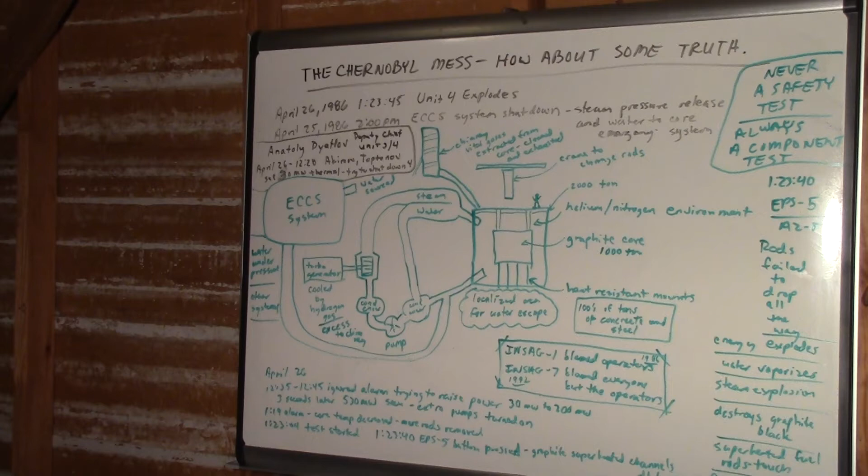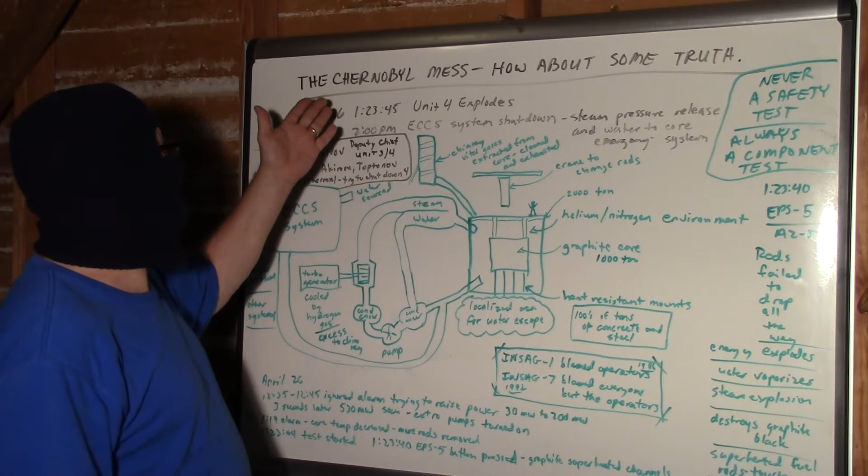How about some truth? First off, any report that says that explosion happened because, and solely because, of design faults in the reactor is a bald-faced lie.

In 1986, the International Atomic Energy Agency released a report that blamed the operators, and in 1992 they came back with a report that blamed everybody but the operators. And the facts of the matter are that the reactor was mishandled by one person in particular who was charged with doing a component test on a live reactor.

They had this turbine test that they had to do, which was a spin down turbine test to see if they could derive enough electricity in 60 seconds to power pumps that put water to the reactor core to cool it. They should have done this test on a turbine connected to a similar pipe but not connected to an active reactor. They should have never done this on an active reactor.

And this 1992 report seems to completely forget about how the reactor was mishandled. It actually says in the report, in not so many words, that any nuclear reactor that depends on human operators is bound to have an accident. Well, that's an interesting assertion, because as far as I know, every nuclear reactor in the world is handled by human operators.

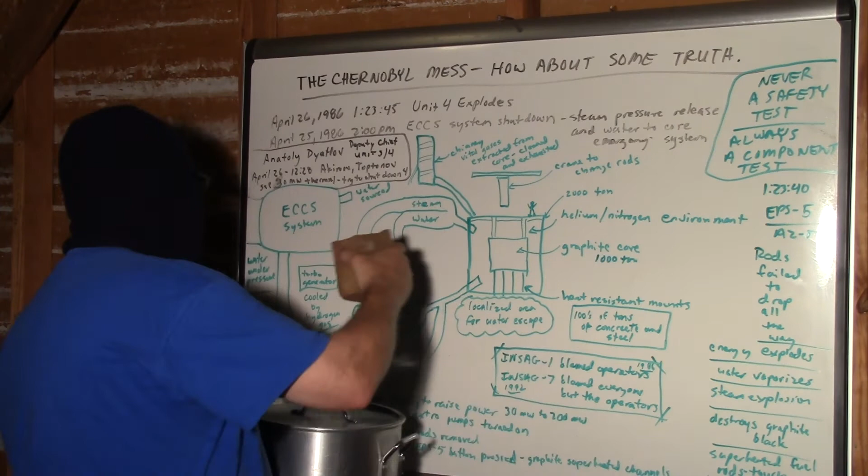Ironically, they pull the hydrogen off and run it down as a gas to cool the generators. It's just really neat. They store the hydrogen in tanks there too to do that.

There's so many things in this reactor that are advanced and designed to create a safe operating system, that if you follow the rules, it's a relatively stable reactor that will not get you into trouble.

The one thing the Chernobyl accident did show the entire world, and it's incontrovertible, you cannot argue with this, is that every nuclear plant needs to have a containment system. They have to have it. You cannot have what happened at Chernobyl ever happen again.

I'll get into the nature of some passive containment systems, some sort of space age stuff, at the end of the video. But for right now, let's just say they should have had some form of containment over this thing, even though there was an explosion that would have probably damaged the containment building. It's almost guaranteed, because it pulverized the concrete building when this second explosion went off. We're going to get into that too.

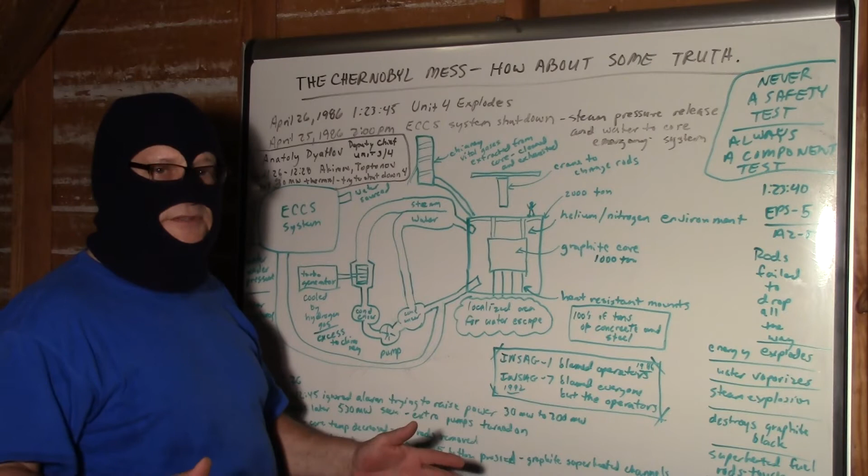So what do you do? Well, my view was you talk to the electrical engineers. First off, let's go to the core of what they were trying to do that day. And it matters. The INSAG-7 report doesn't even seem like it matters. But they were gambling the entire reactor so that this generator wheel would spin for 1 minute of free power. That's all they were looking for.

This sucker weighs thousands of tons. You would not believe how heavy this sucker is. I saw the weight of the generator and the weight of the turbine wheels, and it's thousands of tons. This whole system here is just incredibly heavy. So you can imagine what it takes to spin this thing. And not only that, generators have their own resistance inside of the stator as it spins through magnetic poles. And like I said, I had another video here which, primarily because of the drawing, I had to take off because the drawing was not accurate.

Anyway, if you've ever spun a small electric motor or a small generator, when it spins through the poles, you'll feel resistance. And that's a little teeny tiny thing. You can actually feel the resistance. Imagine that multiplied by 1,000,000, how much resistance that is going through the poles, plus spinning the thousands of pounds of steel and exotic metals that's in this generator system.

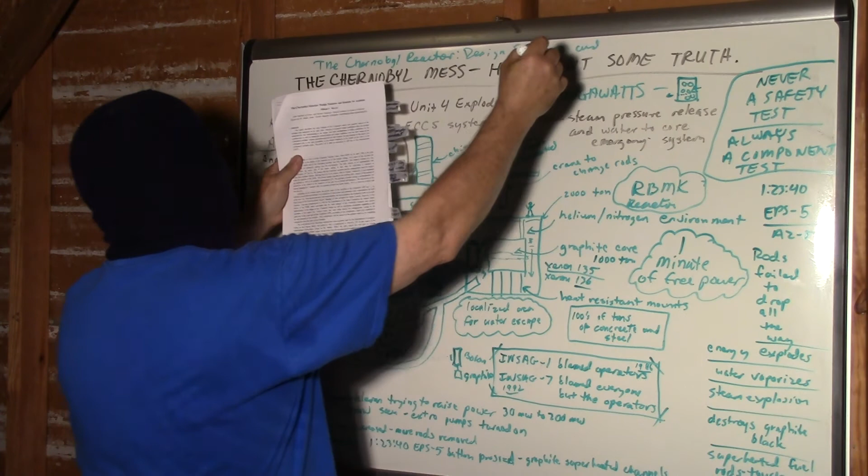The Chernobyl reactor design features and reasons for accident, by Mikhail V. Malko.

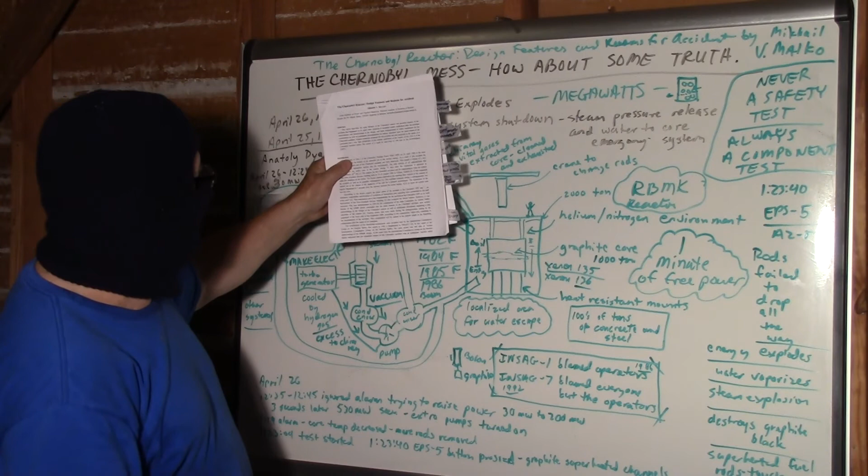You want an insightful description of everything that happened in that accident, and you want really good information from someone not wearing a mask, get to this and download it. I think it's like 17 pages maybe, but that's my copy of it right there. And just read through that thing and just be really saddened, because Dyatlov should have never done this.

And when you look at his life, he was born to poor parents, they were raised in farmland around a penal colony, so he knew about what the communist system would do to people who spoke up. He was an electrical engineer, went to work on Soviet submarines, putting reactors in. He got radiation poisoning and got really, really sick. His kid got leukemia and died. He went to Chernobyl, and I caught myself feeling sorry for this guy.

I mean, you look at the guy, and he looks like a proud Russian guy that was just trying to do his job. But then when you go on this site, let me do a little clean off here, because I think we've done enough with this here.

I mean, they remove rods. They say this test started at 1:23:04, but there are indications in some of this literature of pumps being turned off like a half an hour before that. And then there's indications of all the pumps being turned on at one time. The problem with that is, if you get too much velocity through the pump system, it doesn't go through the radiators slow enough to take the heat out. So you return heated water back into the core.

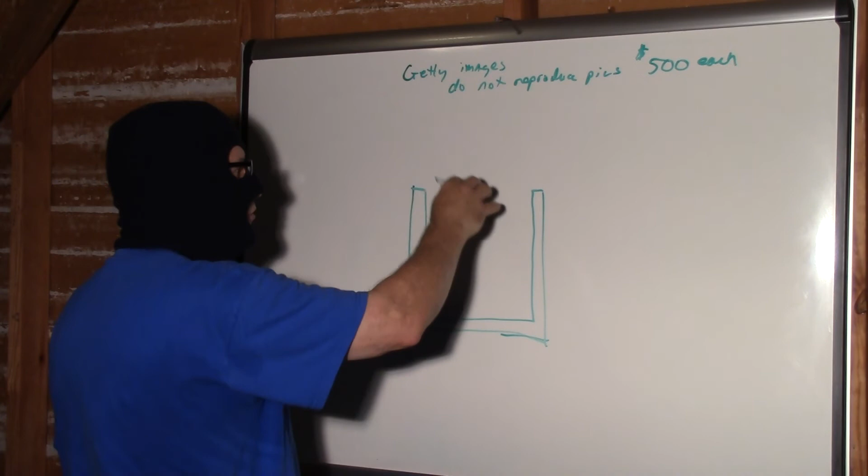But this is where the cap sits. Here's where the core is. There's pipes right here, like this, and this sucker is massive. I mean, it's 1,000 tons. I saw numbers on this of being 1,000 tons to 2,000 tons.

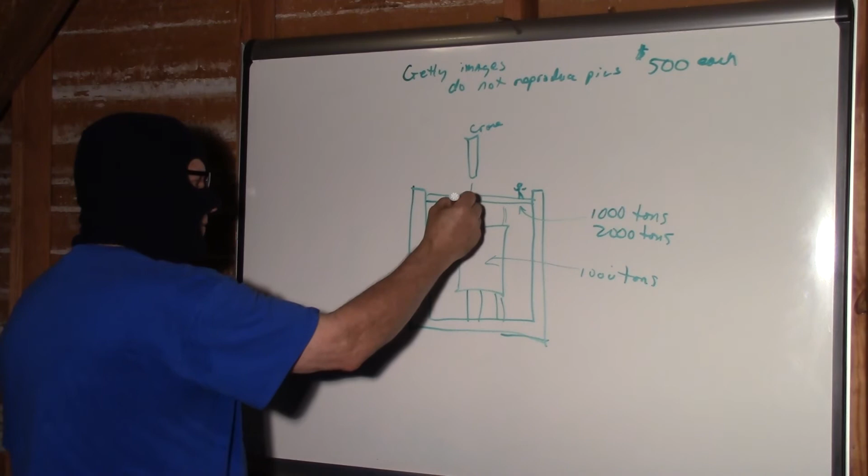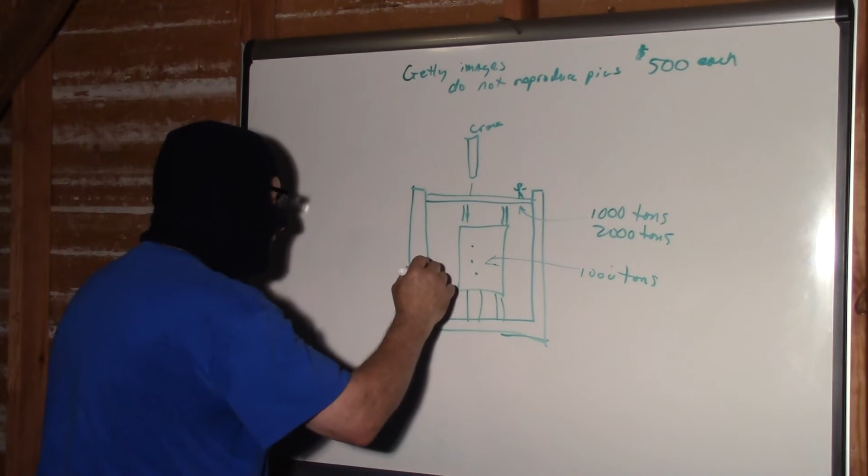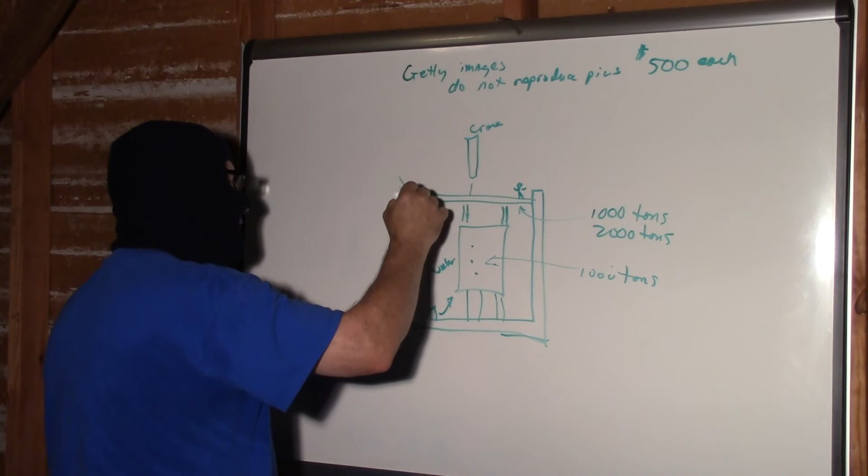And you got a machine here, a crane, that feeds fuel into these lines, and I would assume also can put absorber rods in there too if they need them. And they go down into the core here, and this is all water through here, going up through here. You got your water coming in this way, going in, steam and water going out.

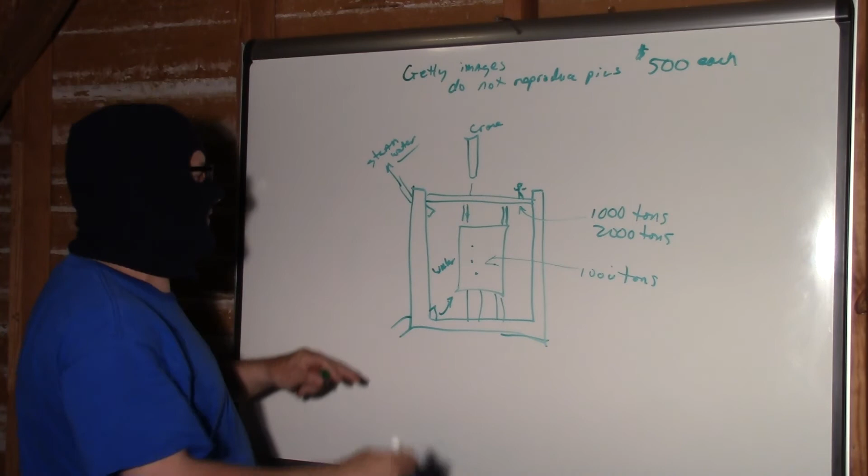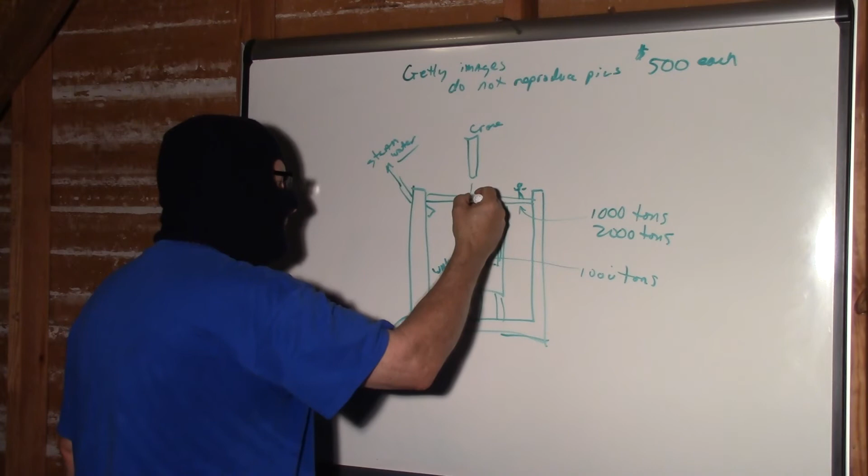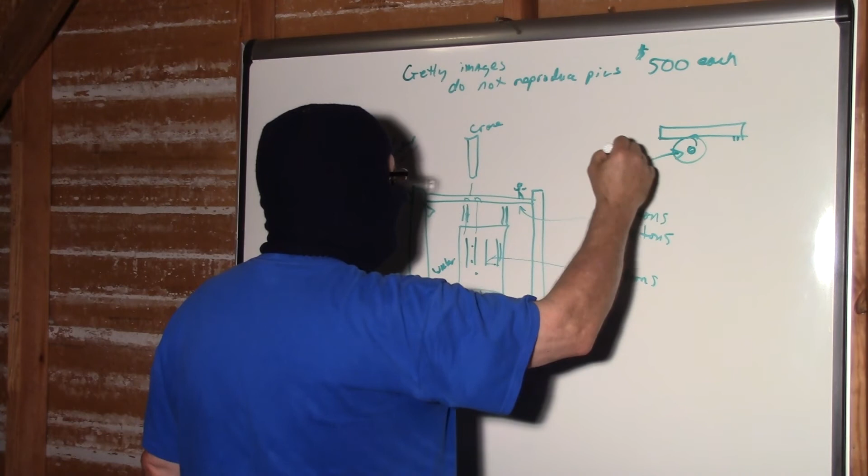All of these fuel rods in here, all of these absorber rods in here are tied to a tile each in this top. My assumption is that the tile is like this. It probably has two electrical contacts here, so when the tile goes down into the square, those two electrical contacts touch. This is a motor. This is a cable.

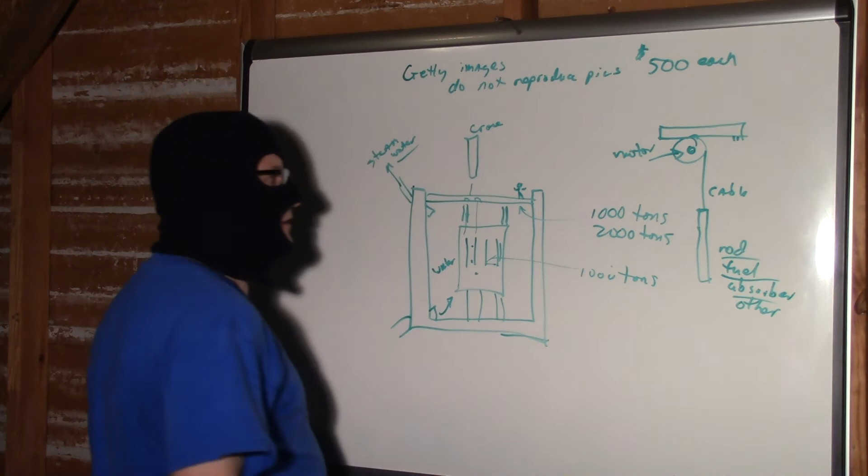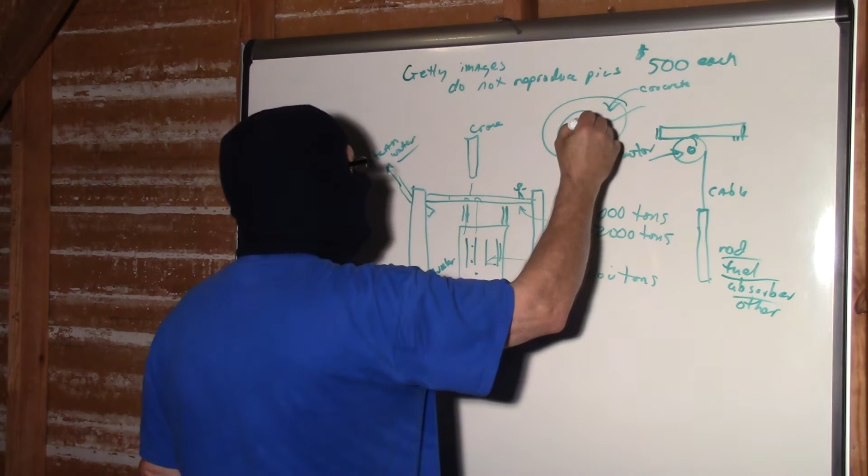And this is the rod, be it fuel, absorber, or other, because they had several different types of rods in there. And this fits into a receiver in this cap. Now the way this cap is designed, it's like this and like this, and all your fuel rods and stuff goes in here. And this is a massive, massive concrete piece. And I understand this is steel, and I could be wrong about that, but I'm doing the best I can. But they're all hanging right here, like this, okay?

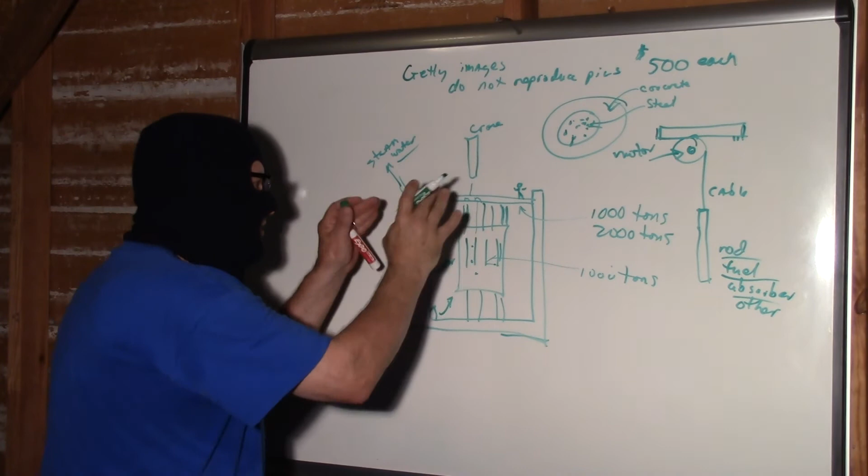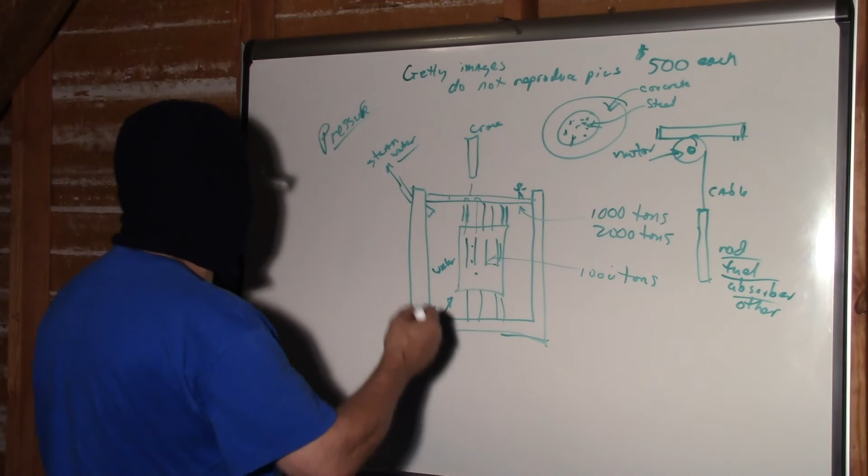And you gotta understand that this is all steam under pressure. I had to laugh every time on this HBO special for Chernobyl, they said, "How does an RBMK reactor explode?" Well, dumbass, you're dealing with steam. Anything that deals with superheated steam can explode. They had a real problem with that with locomotives, with steam generation in houses. They have a problem with that today, and that's one of the #1 things that union steam fitters deal with. You always want to have a check valve system where excess pressure goes.

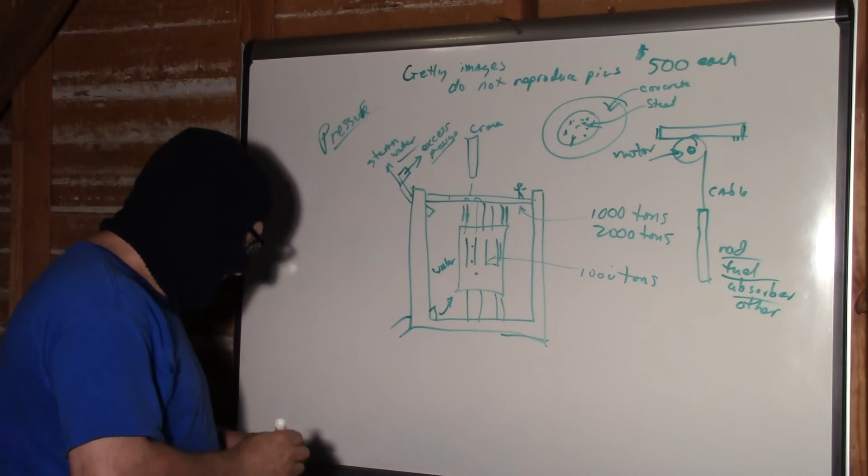I'm not going to go through all of the things they shut off. They shut so many safety systems off before this thing blew up. For that INSAG-7 report to say that this was bound to happen because of design failures, that is a bald-faced lie. It takes the responsibility for those people's actions from themselves and puts it on the designers. The designers put the safety systems in there. They were not the ones who turned the safety systems off.

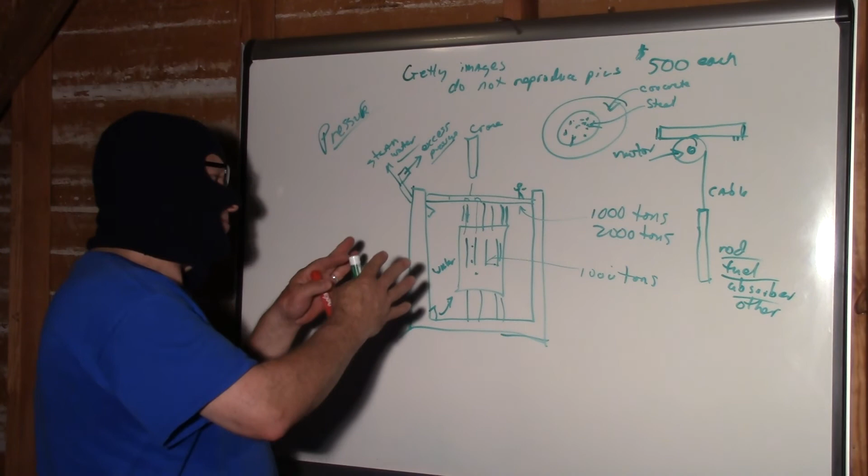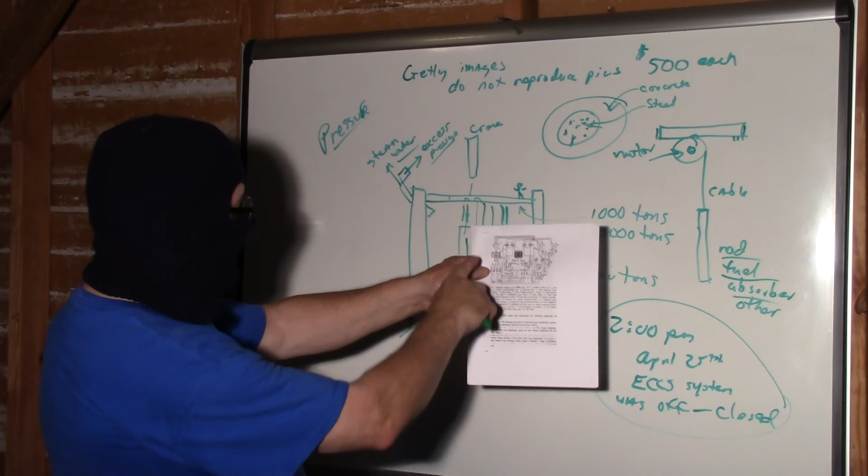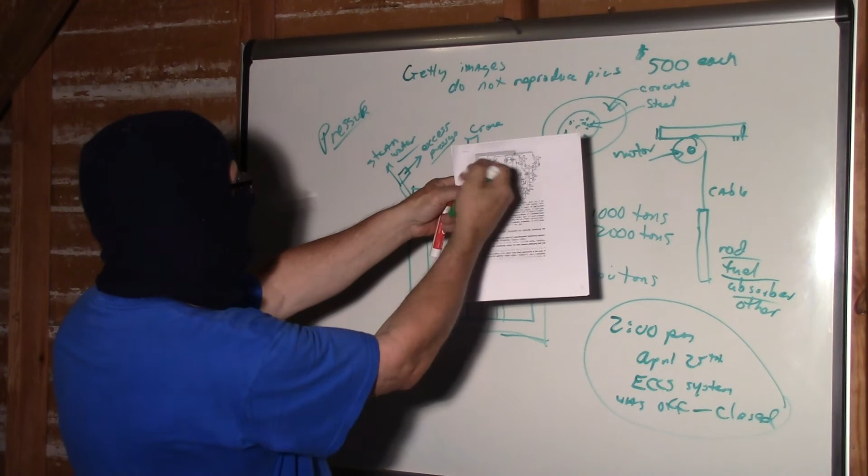Anyway, so this thing got smoking hot. Now remember, since 2 o'clock p.m. on April 25th, the ECCS system was off, closed. This little box right here is a neat little box, because that shows you the steam coming out of all of the lines, coming over to this collector, and this is wide open. You know why that's wide open? That's because the steam is generated here, they lower the velocity of the steam coming out, it shoots up here and shoots out.

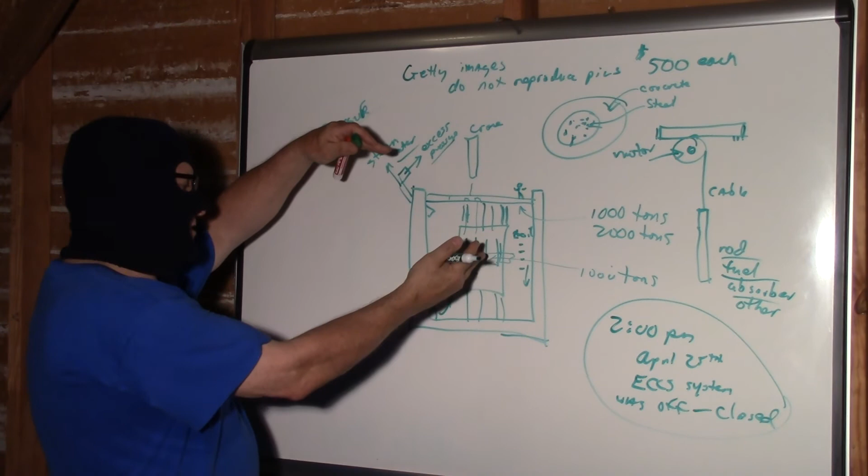And according to testimony after the accident, they were used to hearing steam venting. It's a very loud and painful sound if you're close to it. Well, they had turned that system off. So now you've got this boiling reactor that's been recycling heat and pressure for friggin' hours. The boiling of the water is going lower and lower. You got this poisoned reactor with the xenon in the middle of the core. So now you've got 1, 2, 3 sections of reactor.

I'm not smart enough to understand all the peculiarities of it, other than the fact that you're going to create a situation where once the boiling gets down here, this is a very dangerous situation, because you get into this cyclical heating arrangement. Heat, boil, heat, boil, heat. Heat, boil, increase reaction, increased heat.

And this doesn't happen in seconds. This happens in tenths or hundredths of a second. Once it reaches a certain point, once you so destabilize the cooling of this core, you lose the ability to control what's going on inside of it.

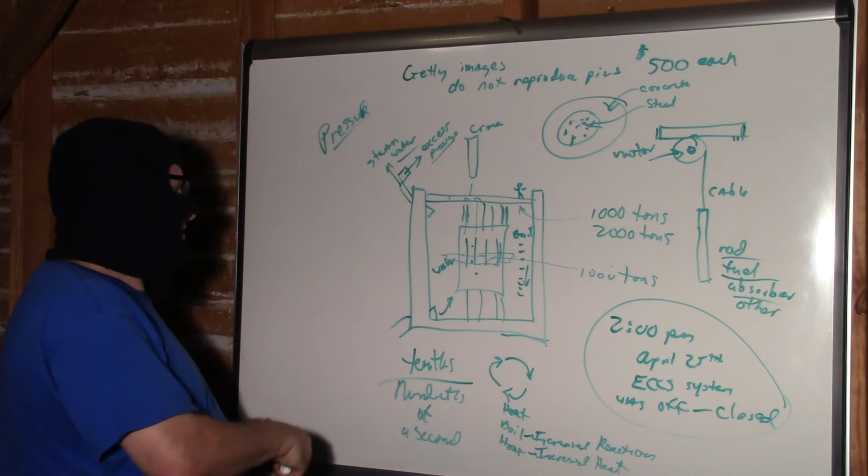For them to say that the ECCS system turning off had nothing to do with this is a bald-faced lie. And all the other safety systems. I mean, they changed the boiling set points in the steam separators. They changed several other parameters. They were playing all kinds of things, all designed to get this turbine to spin. You know, they got it to spin all right. It spun its ass right out the building.

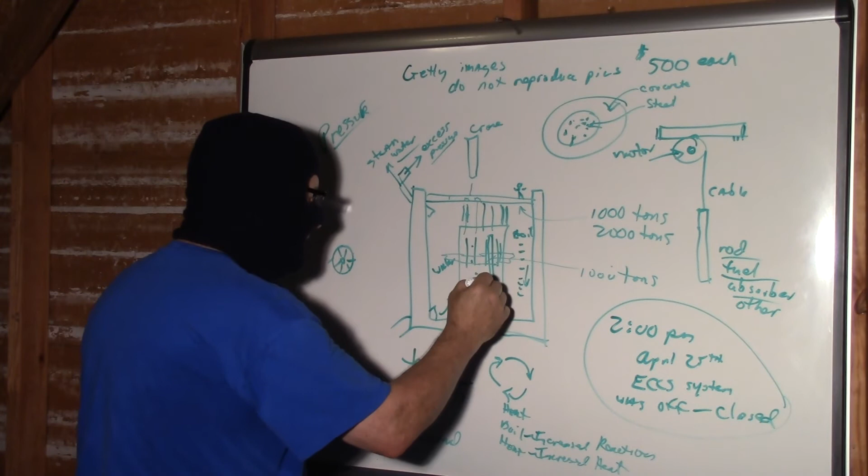Anyway, let's get to the explosion. Okay, so they do the AZ5 button, and the rods, which are supposed to go all the way down like this, and then that displacer is supposed to be down here at the bottom, so you get a full penetration of these rods. They start absorbing the neutrons, and you get this cessation of reaction, and immediately it's the same thing as shutting the reactor down. That's where you want that to be.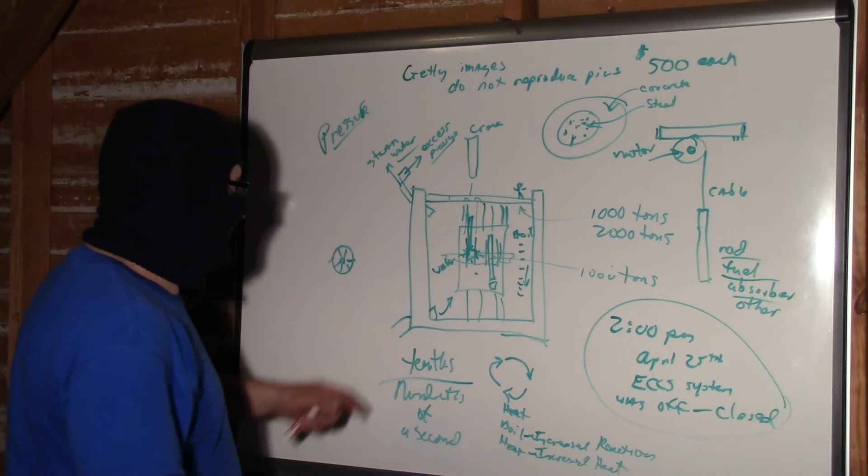Instead, what they get is this. They get this, and they get this. You get it stuck, and they get this displacer right in the middle of where this xenon core situation was. Now you've placed so much increased reactivity right in this section of the core. Immediately you boil the water away and you dry the core out. And what you've done is you essentially took an acetylene torch to this part of the core. You just cut it right in half.

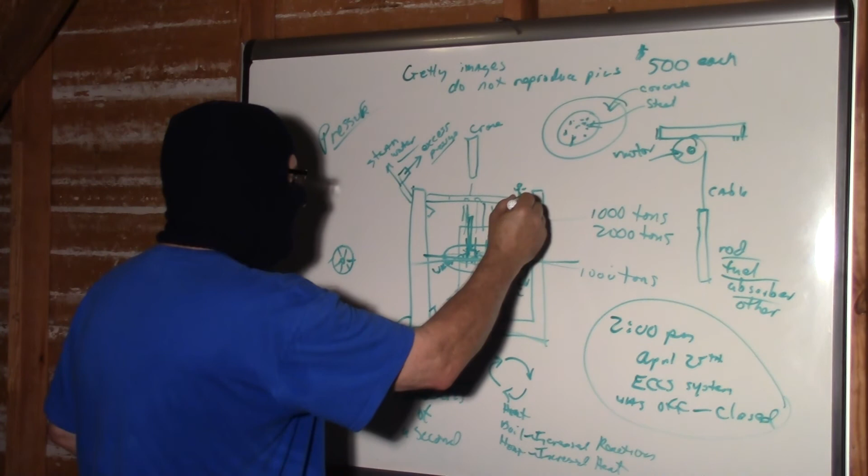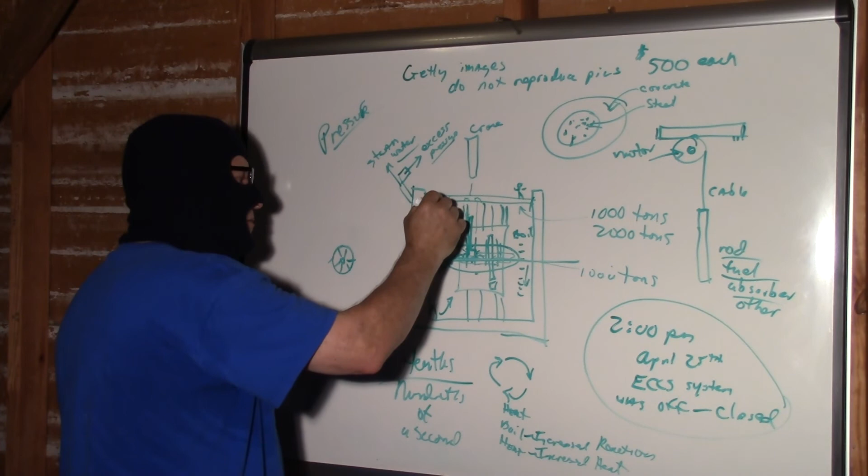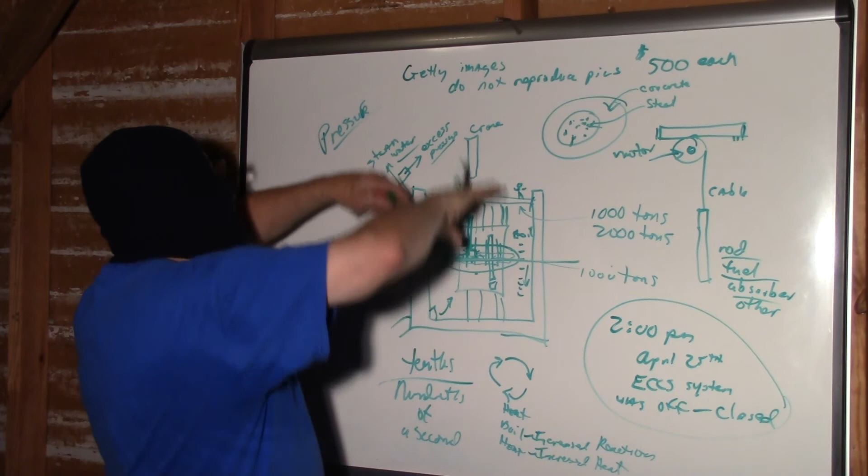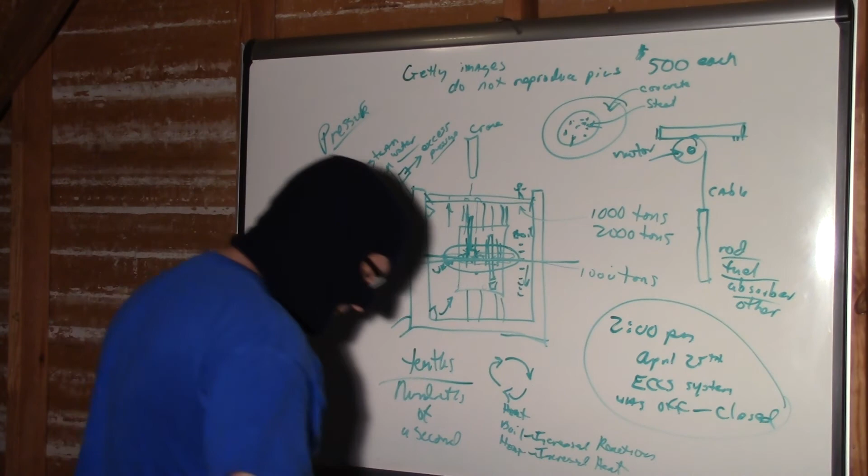On top of that, now you've got this steam situation going on, and what happens is, no doubt when they put this in here, they drop it down like this. Well, of course the mounting, everything is sealed. The mounting bolts fail. Everything fails because instantly there's hundreds of thousands, maybe millions of pounds of pressure on this cap. And it pops up. And this is what the first explosion is, the steam popping up. The steam pops up the top.

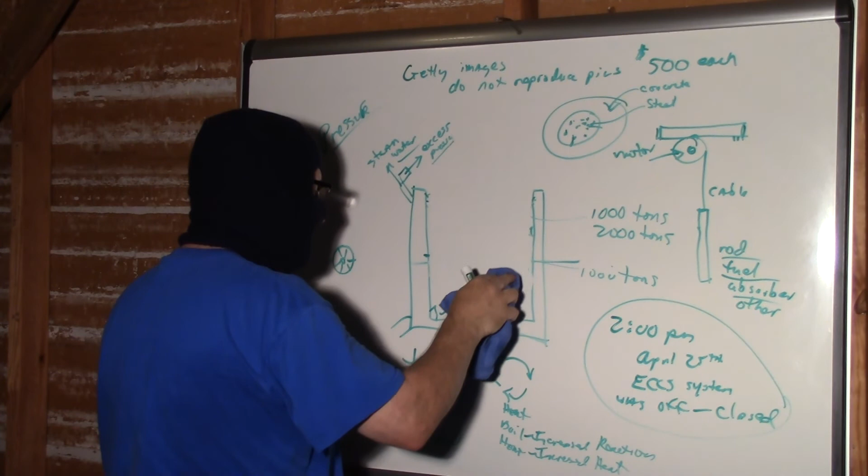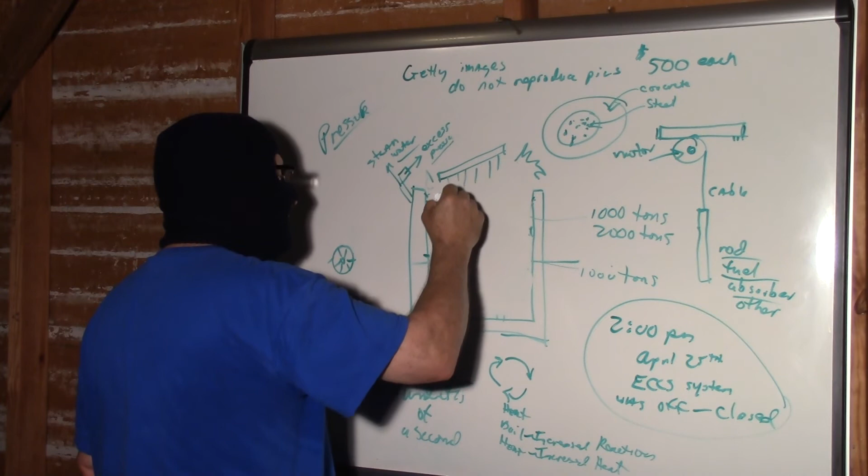And as it does that, it shatters that damn graphite core, because graphite is fragile. It's not something that intrinsically is extraordinarily strong stuff. So now you got this top that's up like this. All of these tiles are holding these fuel rods and stuff like this. And you got to understand, by the time this happens, we're talking about tens of thousands of degrees in this area right here. And they touch, and that's where your secondary explosion occurs. And this is the big bad one. This is the one that sprays shit everywhere.

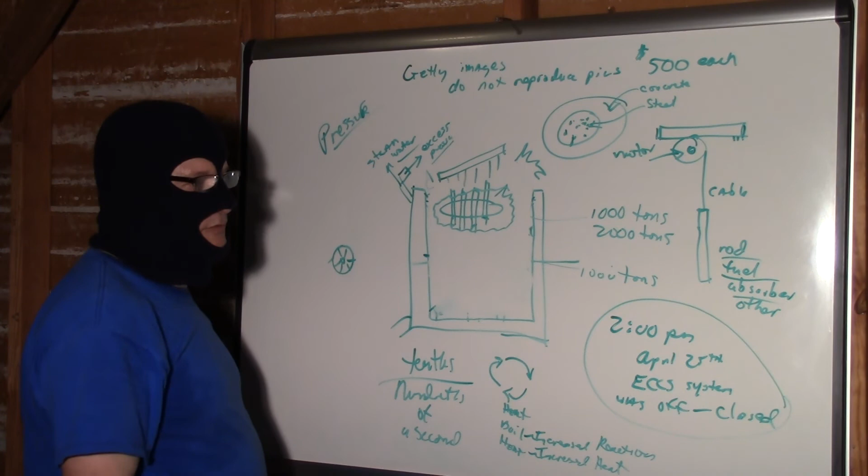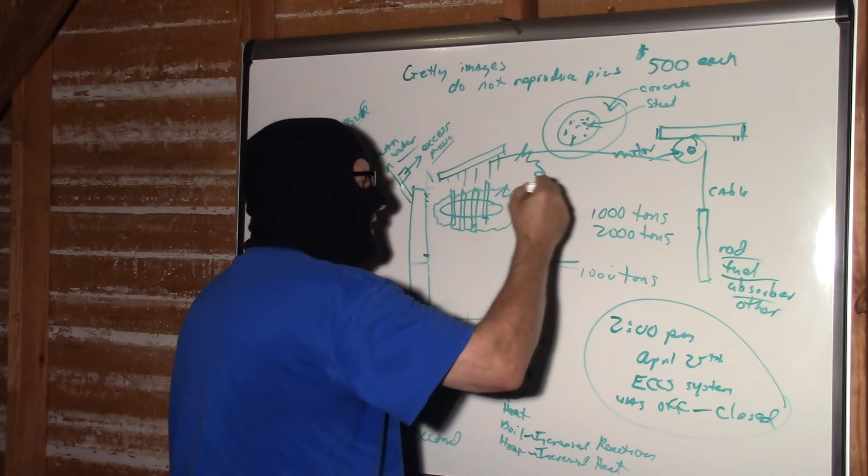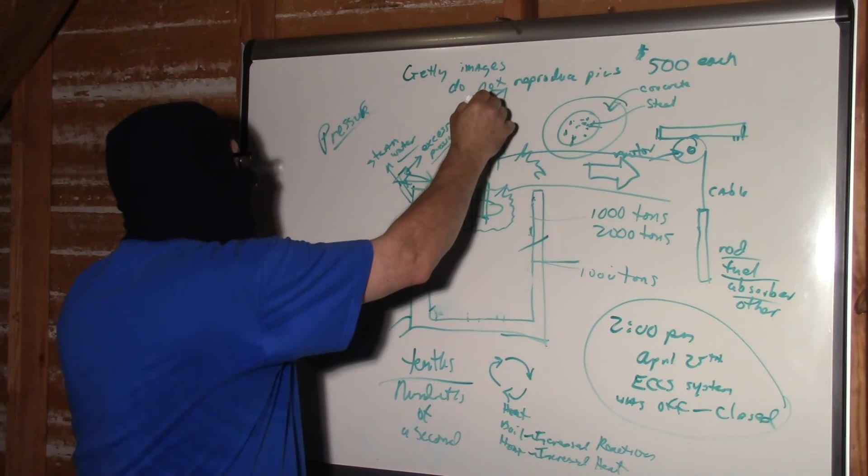Now, they got kind of lucky, I guess, because if you look at the explosion of the reactor, it was a low-level explosion that went like this. A lot of the force went like this. And like this. And that's where it just pulverized all this concrete, pulverized it. And if you look at the turbine building, here's the chimney. Look at this turbine building, you'll see that the tiles on the top of this building over here are down,

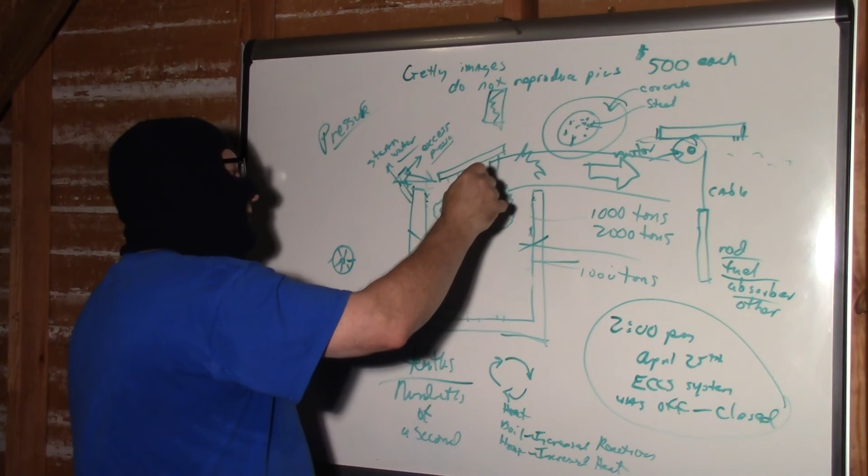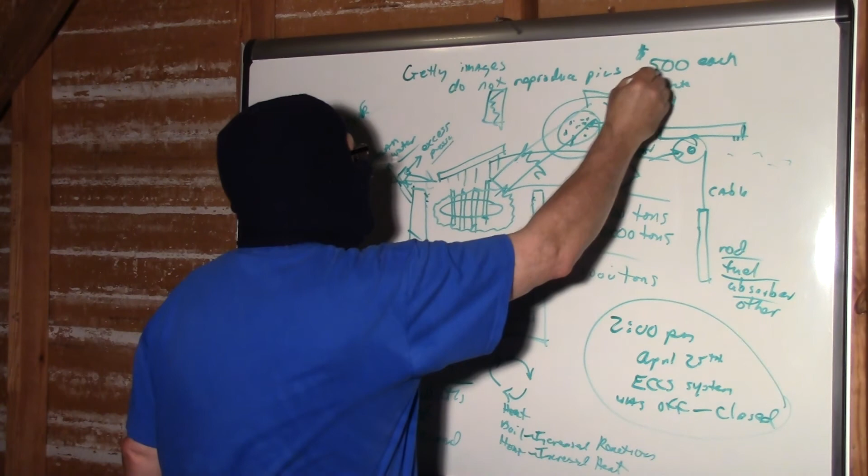but I'll bet you there is a huge amount of, I call it the Russian nuclear shotgun effect of stuff right here. And unfortunately, this is where a huge amount of nuclear fuel got ejected. And I mean ejected not only in a direction like that, but in a direction like this. I mean up into the damn stratosphere. And it's so sad because tens of thousands of people were affected by this. Actually millions of people were affected by this, but tens of thousands of people died because of this. And we'll never know who they were, and they'll never know that this affected them.

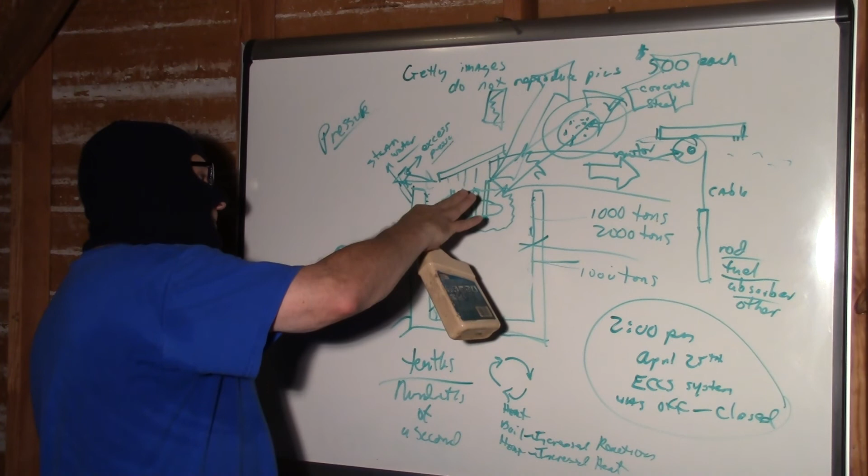But when you look at how this happened, this 2,000 ton piece of hardware, I'm surprised it stayed in one piece, but it did, and it fell over. The fact that it didn't go far tells you what type of nuclear explosion it was. And I want to hit one last thing and then we'll be done.

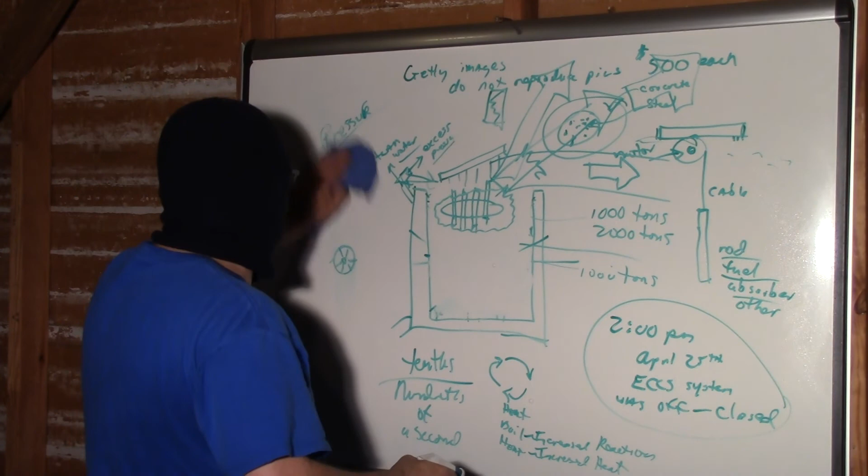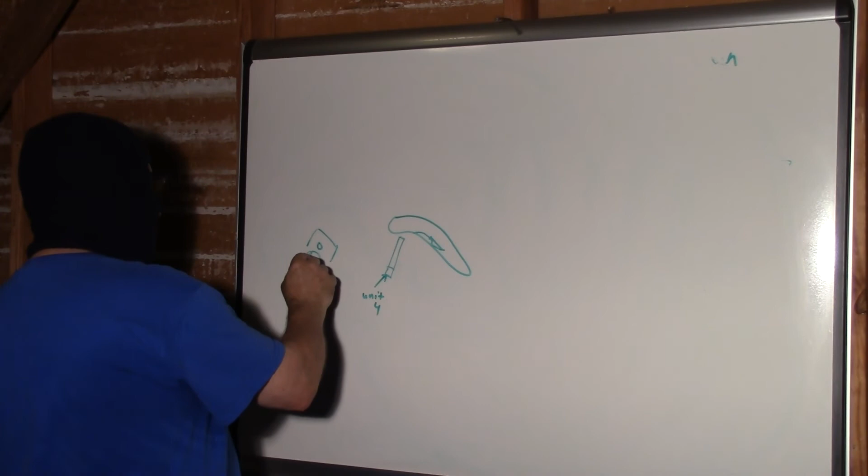If you look at an overview picture of the Chernobyl facility, you get this kind of kidney looking thing. You get this island out here. Here's the Chernobyl facility. Here's Unit 4 right here. And if you look at the overview picture of the building, and you look at where that reactor core was, and where this top is, it's sitting like this. And when that thing blew up, it shot garbage just like that. So it shot it in this direction, like right here. And it shot it literally.

There is a Chernobyl plant, and there is a huge amount of nuclear fuel contamination. It blew that crap 100 miles away. When that top came up like that, I mean, it's amazing. Here's your Russian pot, goes up like this, boom! And the shit went that way.

And the thing is, if you look at an examination of how the core, how the top landed, and how the core failed, because they have, in this INSAG 7 report, a graphic picture, a force picture of where the failure was in the core. But you can tell what side, if I could get to exact locations of stuff, this side was probably cooled better,

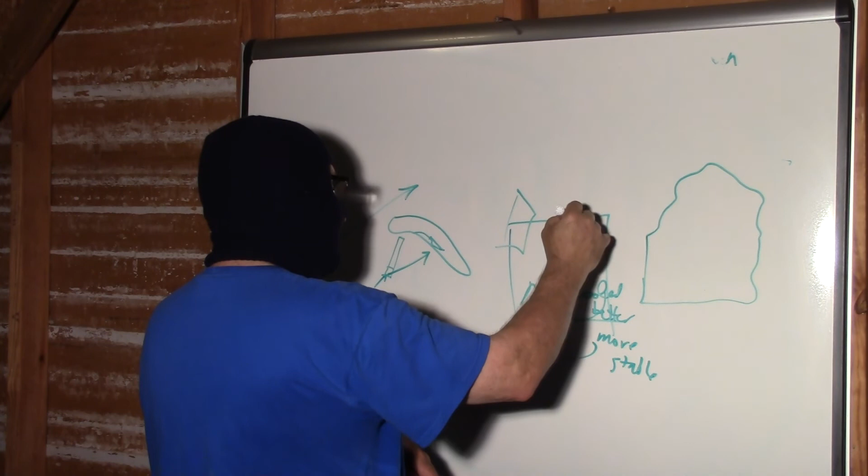more stable, or I'm sorry, it would have been this one. This side would have been cooled better, more stable. This side would have been less stable. And that's why you'd have more heat on this side. It would have raised the top up and made the angle like this.

The fuel rods, the graphite core would have been destroyed by the steam explosion, by pressure. The rods pull up, all the rods pull up, they all come together, boom, you get this reaction, and you get all this crap that just goes 100 miles away, and nobody's life is the same.

They mentioned scenarios online that there's no fuel left in the core. They mentioned that no graphite was burning in the core. Well, something was burning at thousands of degrees. There was testimony from one guy, a concrete worker. He's working at Unit 5, like 500 meters away, and he said that he heard what he thought was a steam explosion, and then he saw this bright blue light and a massive explosion.

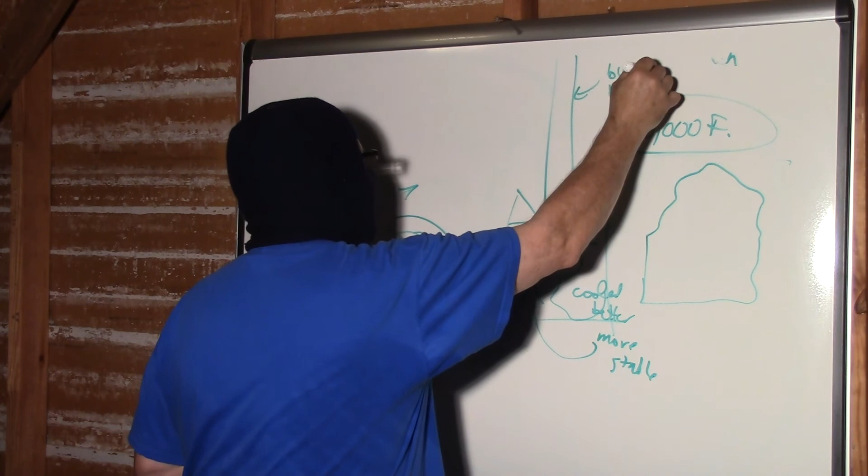Well, the bright blue light shows that the temperature was 10,000 degrees Fahrenheit. And they also talk about after the thing blew up, they had this bright blue laser-like beam going straight up in the air from whatever was burning down here, and I submit to you that that was pulverized graphite and nuclear fuel that was in a very unusual, and like I said on the Chernobyl special, never before seen on Earth situation. Hopefully we'll never see it again.

Now, let's get into a little discussion about containment. The statement was made in one of these reports, I think it might have been in Malko's report, that containment in a situation like this with the explosion wouldn't have made any difference. Well, anything that slows velocity down does make a difference. Containment in this situation,

I mean, this sounds crazy, I know, but if you could put rollers filled with some form of Kevlar-like fabric and put rockets on it to shoot it over the building, or just something that would cover the building over to contain this debris from getting up into the atmosphere, because this thing belched pollution for weeks, and it messed up a lot of people's lives, millions of people's lives.

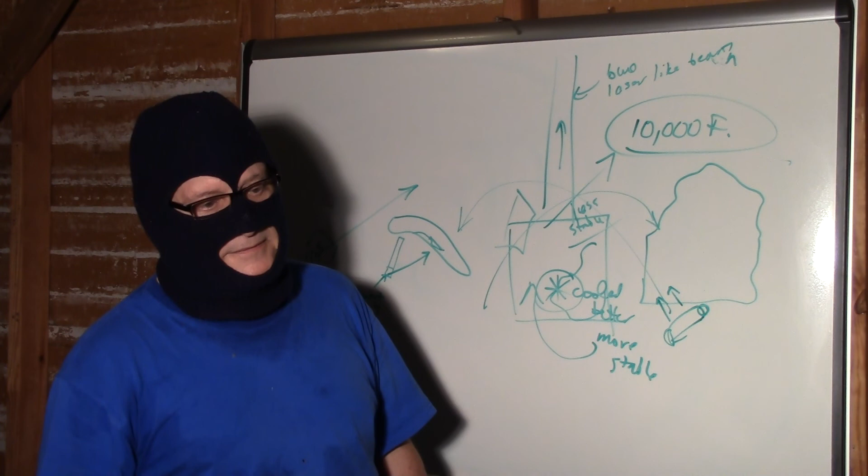Let's hope we have a safe future from here on out with our nuclear power plants, and that these commissions who write this crap can choke on it. What you do matters.